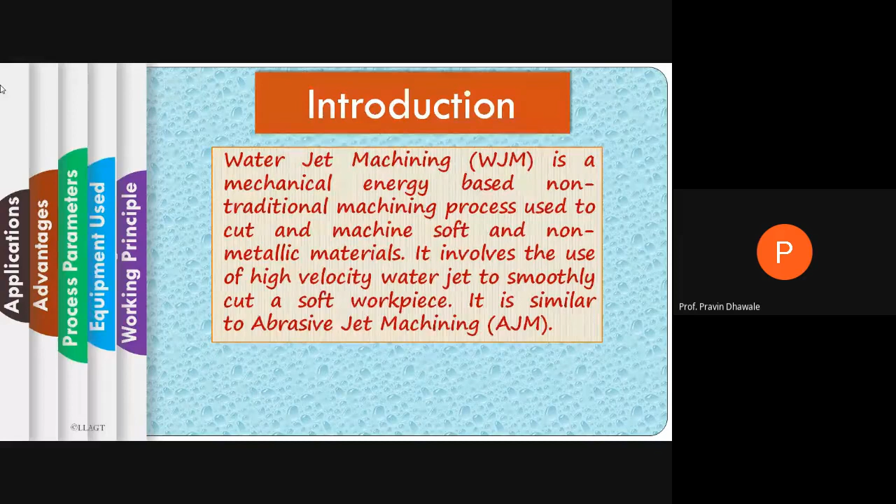Okay, so that's all about water jet machining. In short, the description about water jet machining: first point, it is a non-traditional mechanical energy-based process. Second point, it will be used to cut soft material as well as non-metallic material. And high-velocity water jet is able to cut this material very smoothly.

When it passes through this nozzle, its pressure energy is converted into kinetic energy. This happens because the nozzle has a convergent cross-sectional area where pressure energy is converted into kinetic energy. So at the outlet of the nozzle, you get a high velocity water jet. As the velocity of the water jet is very high...

Now, what are the different process controlling parameters in case of the water jet machining? What is the first parameter? That is the stand-off distance. What is the stand-off distance? It is the distance between the tip of the nozzle and upper surface of the workpiece.

Up to a certain limit, as we increase the distance of the tip of the nozzle from the surface of the workpiece, as that distance goes on increasing, there will be increase in the material removal rate of the workpiece. That is, as stand-off distance increases, the material removal rate also increases, but up to a certain level or certain point. Beyond that point, when you are increasing the stand-off distance, the water jet velocity gets reduced.

And if the velocity gets reduced, it will impact the removal of material from the workpiece. That is, with increase in stand-off distance, no doubt the material removal rate from the workpiece by water jet machining increases up to a certain point. Beyond that point, the material removal rate decreases because the velocity of the water jet keeps on reducing.

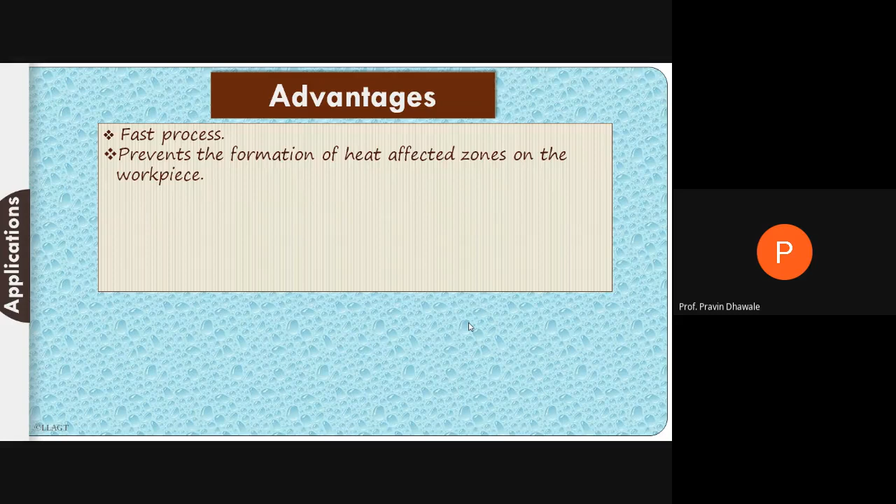It automatically cleans the surface of the workpiece. The same fluid acts as a carrier of the removed material from the workpiece. So there is no need for any other fluid or any other means to clean the workpiece in order to remove the material which is dug out by the process of water jet machining.

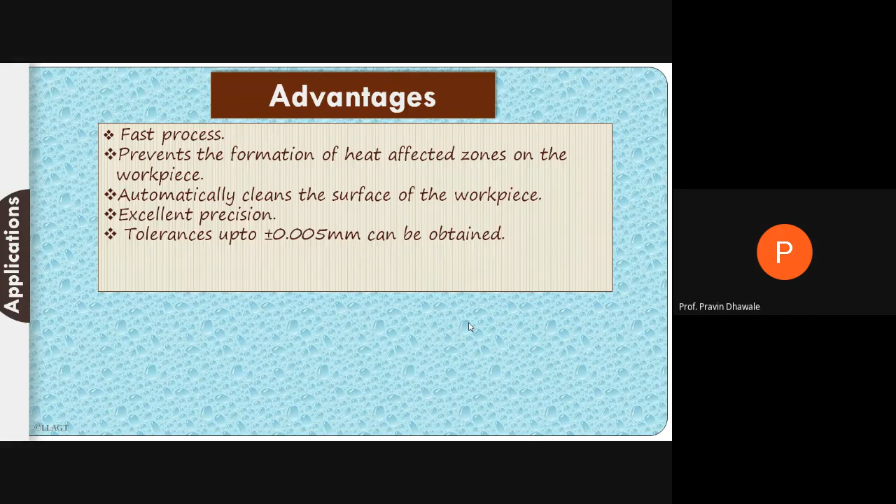Whatever accuracy or precision you get by using water jet machining, it will be more as compared to other non-conventional processes. The tolerance value, it will be obtained up to point not not 5 mm in case of water jet machining. That plus or minus point not not 5 mm tolerance is possible by using water jet machining.

Water jet machining cannot produce any kind of hazardous or harmful gases during the process of operation. So this process we may call an eco-friendly process. Water jet machining is an eco-friendly process.

These are some of the listed advantages in case of water jet machining. First, fast process. Second, prevents the formation of heat affected zone. It also helps to clean up the surface of the workpiece. It provides good tolerance up to a range of plus or minus point not not 5 mm with excellent precision. This process may be called eco-friendly because it does not produce any kind of hazardous gases. So these are the advantages of water jet machining. You have to write all these advantages neatly.

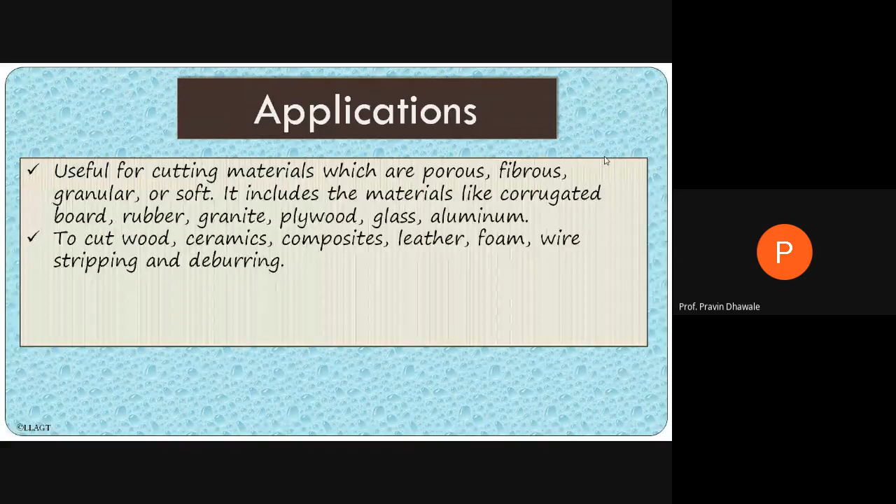The baseline is that the material must be softer, or non-metallic. It's used to cut wood, ceramics, composites, leather, foam, and for wire stripping and deburring. These are certain applications of water jet machining. Also, to machine or cut wood, ceramics, composite, and foam material, we may use water jet machining.

The next point is related to some specified applications, like in aerospace and similar industries. Cutting of asbestos is done using water jet machining in order to minimize airborne dust in the atmosphere. In certain aerospace industries, to reduce the production of airborne dust, cutting of asbestos is done using water jet machining.

It is used to cut fiberglass and polyethylene, which are used in certain automobile applications or in manufacturing automotive parts. Machining of such parts is carried out using water jet machining. So write down these applications of water jet machining in the field of engineering.

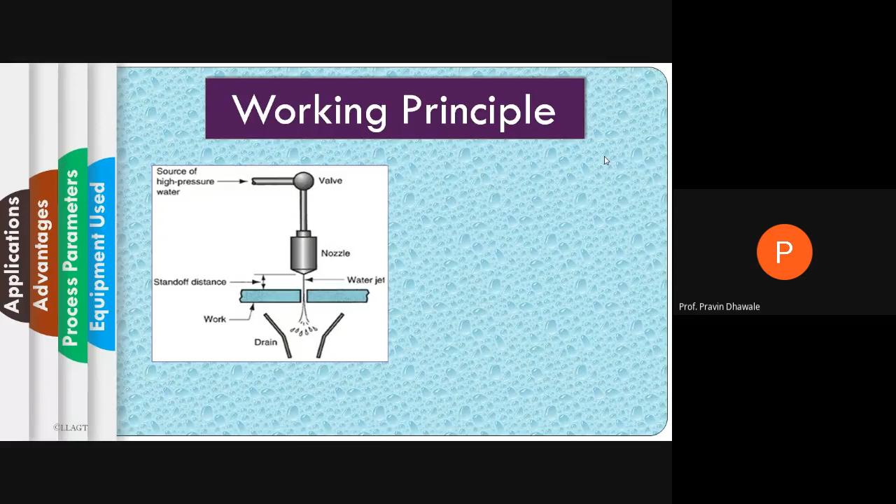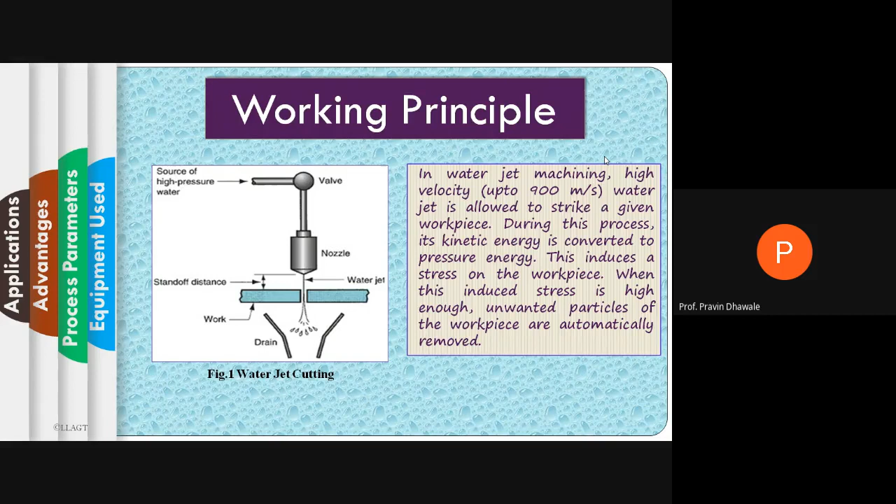Okay, I think it will be over. That covers the applications of water jet machining. So, to take a recap of this lecture: we started with the introduction of water jet machining, then discussed the working principle with the help of a figure, showing how the cutting process is carried out using a high pressurized water jet, which flows through the nozzle converting high pressurized water into a high velocity water jet. Using that high velocity water jet, we cut the workpiece.

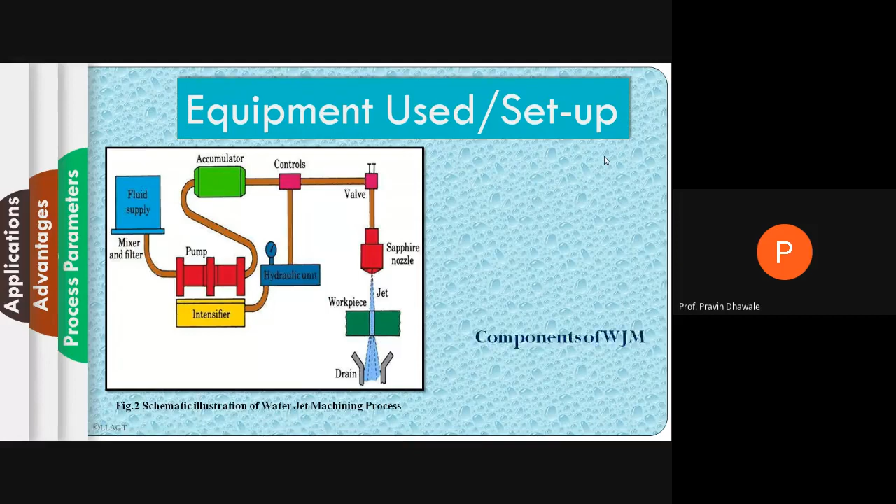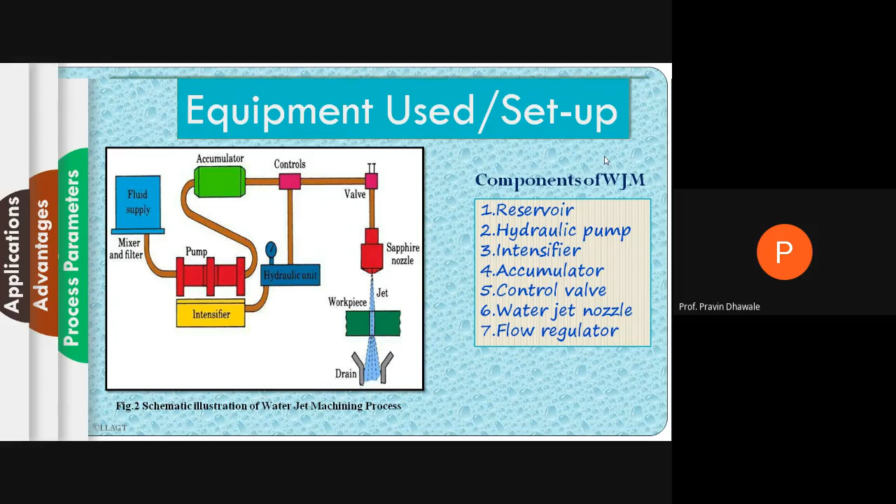We also discussed the experimental setup for water jet machining, which has different components like reservoir, intensifier, pump, accumulator, nozzle, direction control, and flow control. This is a very important parameter point. What are the different process parameters used in water jet machining, and what is the impact of each parameter on MRR, material removal rate? What is the effect of stand-off distance on material removal rate?

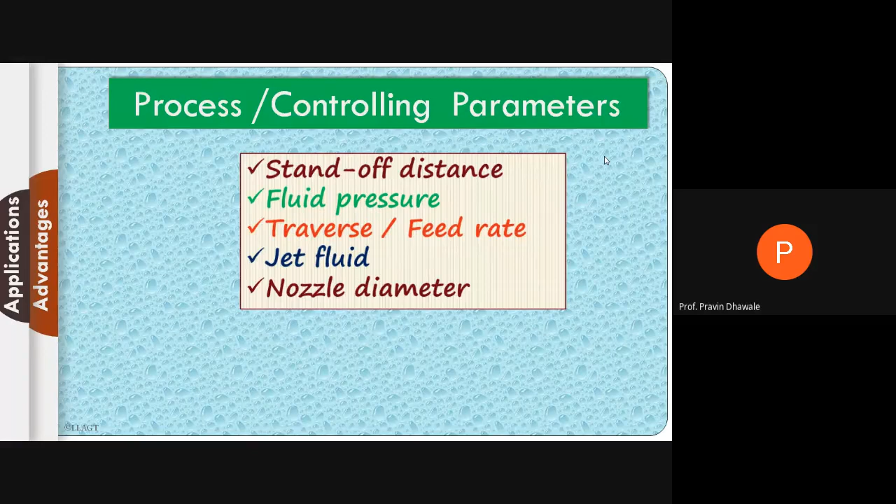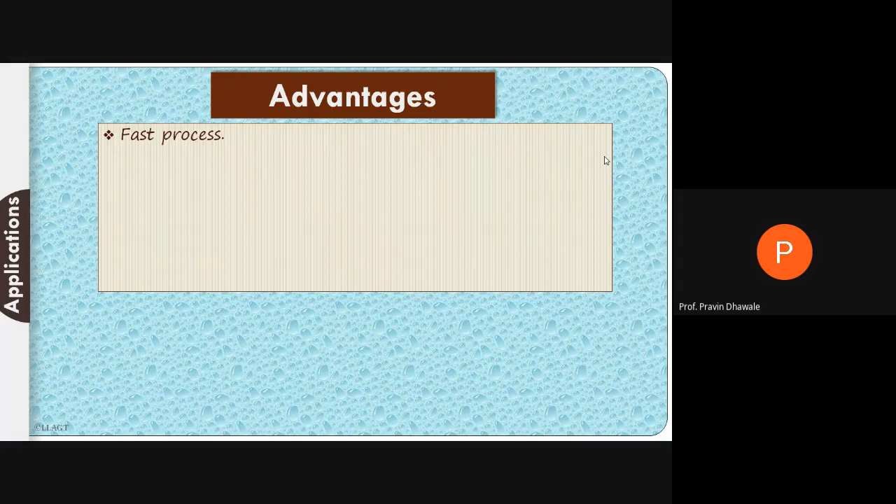What is the effect of fluid pressure on the performance of the water jet machining process? How do fluid velocity and nozzle diameter affect the material removal rate in water jet machining? And lastly, we discussed the different advantages of this water jet machining.

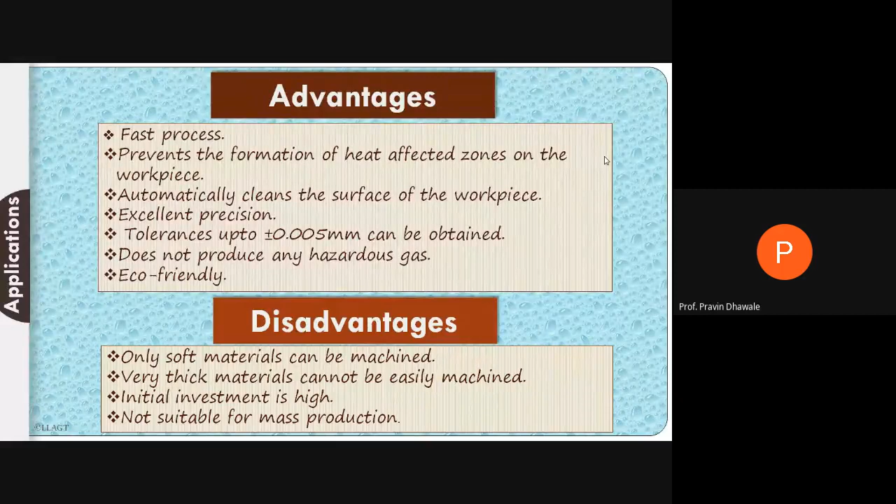Also, we discuss or focus on giving insight on limitations and disadvantages of water jet machining. At last, we cover the applications where we will use water jet machining, and why we study this non-conventional or advanced machining process.

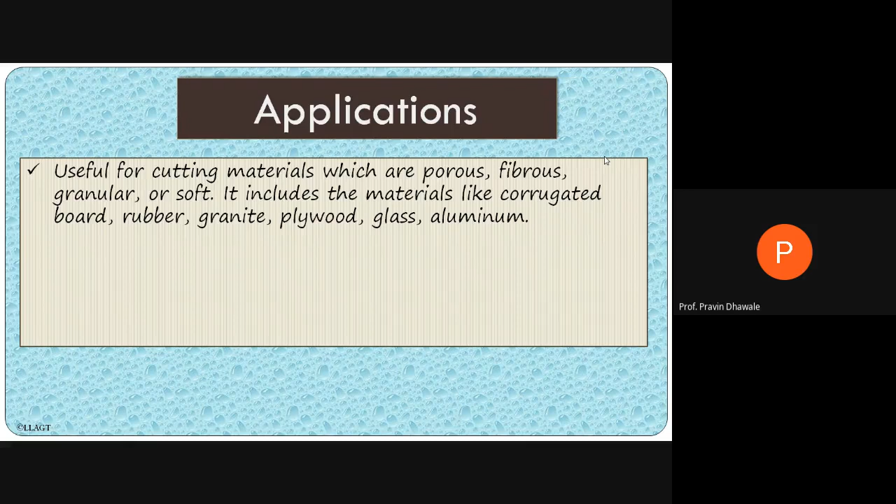We must require certain applications where conventional machining has certain limitations. That's why we study non-conventional machining processes, and among those, mechanical energy based processes. The ultimate answer to study water jet machining is when you have to machine certain soft materials and non-metallic parts—at that time you go for water jet machining.

These are certain applications of water jet machining. Does anybody have any query regarding this water jet machining process? Please feel free to ask. Otherwise, I will ask a question and you give the answer.

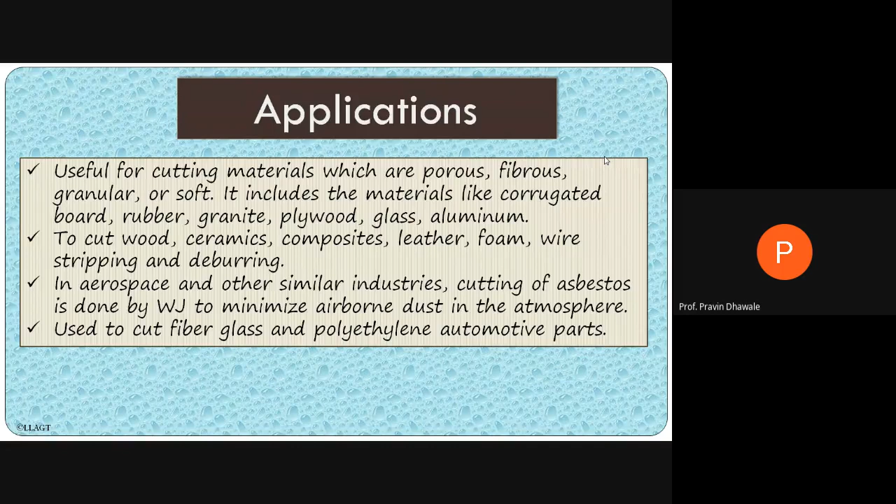I think the concept of water jet machining will be well understood by each one of you. Then we will discuss the differentiating points, or certain similarities and differences, between abrasive jet machining that we studied earlier and water jet machining that we studied right now. So what are the differences or similarities found in case of AJM, that is abrasive jet machining, and water jet machining?

Abrasive jet machining, water jet machining, abrasive water jet machining, and ultrasonic machining—right now we have studied these two processes, and two are remaining, right?

So whatever these four processes are concerned, all of them directly utilize mechanical energy to gradually remove material from the workpiece by the action of erosion. So we may say this is a similarity point for all kinds of mechanical energy processes—abrasive jet machining and water jet machining both utilize mechanical energy to remove material from the workpiece by the process of erosion. This will be the similarity point.

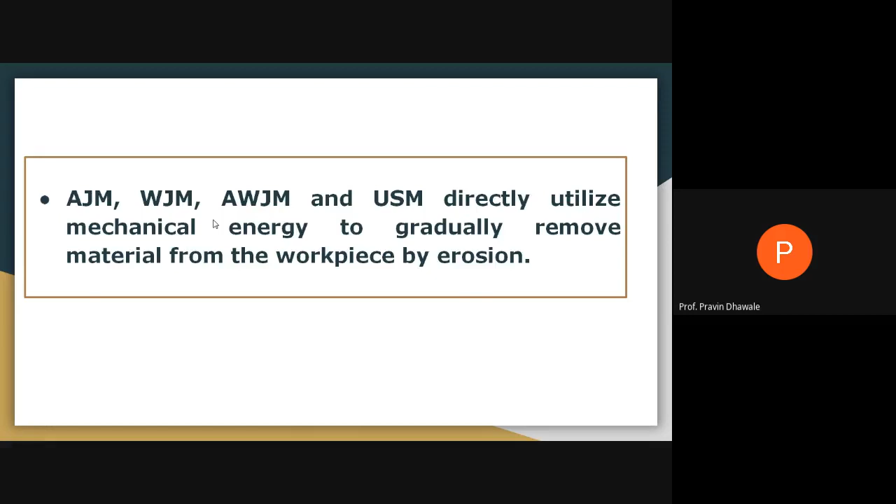Considering the abrasive jet machining setup, it requires a compressor, a filter and dryer, and also a mixing chamber in order to mix this pressurized air along with the abrasive feeder. So at the outlet of this mixing chamber, you are getting the mixture of compressed air plus abrasive particles.

That pressurized mixture of abrasive particles and air is allowed to pass through the nozzle. In the nozzle, pressure energy is converted into kinetic energy, so at the tip of the nozzle you get a high velocity abrasive jet. This high velocity abrasive jet, when it strikes the surface of the workpiece, removes material from the upper surface by the process of erosion.

Why does this happen? Because continuous bombarding of these abrasive particles at a particular location may cause digging or stress induction at that part, and because of that, erosion takes place and material is removed from that specific part of the workpiece.

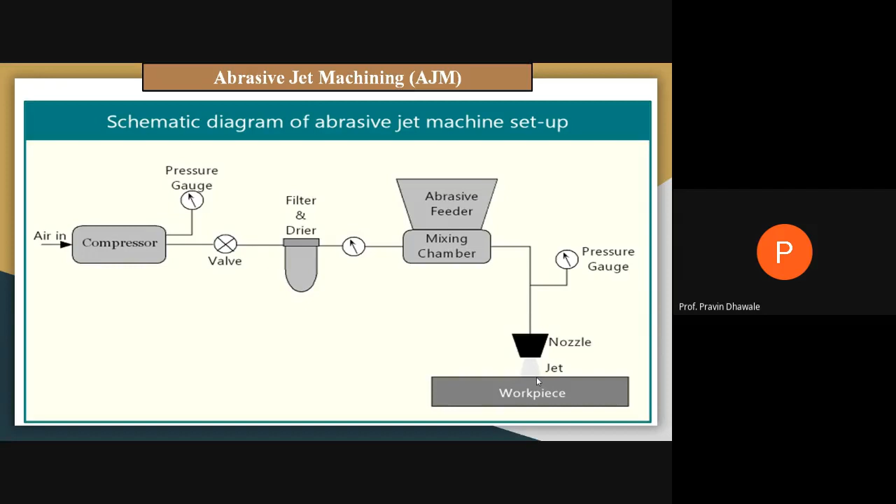This is the schematic diagram that we have already studied in case of abrasive jet machining. In abrasive jet machining, abrasive particles are allowed to impact or impinge on the work material with very high velocity, and this high velocity removes material by micro cutting action as well as brittle fracture of the work material. This will be the working principle.

See here, this is the workpiece, this will be the nozzle, and this will be the diameter of the nozzle. Through this nozzle, you allow high pressure abrasive particles to pass. When passing through this nozzle, you get a high velocity jet, with velocity up to a range of 300 meters per second, and the diameter of the nozzle may vary from 0.2 to 0.8 mm, or maximum 1 mm.

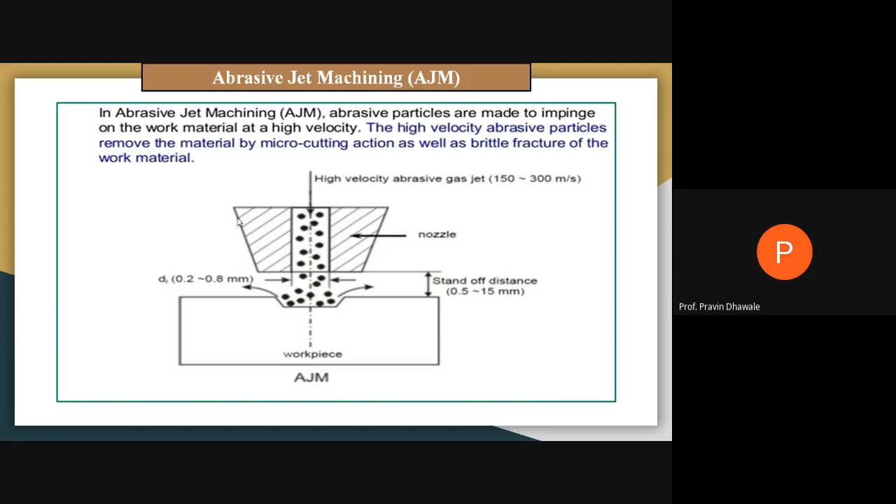The distance you have to maintain between the upper surface of the workpiece and the tip of the nozzle may vary between 0.5 to 15 mm, as we studied in an earlier lecture focused on abrasive jet machining. In abrasive jet machining, material is removed by the process of erosion, which is nothing but removing material by micro cutting action with a certain amount of brittle fracture of the work material.

Just now we have seen water jet machining—we studied the block diagram of water jet machining. In the previous slides, I already explained the working of water jet machining, the different components or equipment used in the setup, and the function of each component.

Sapphire is the material used for this nozzle. This will be the stand-off distance, that is, the distance between the tip of the nozzle or nozzle mouth and the upper surface of the workpiece.

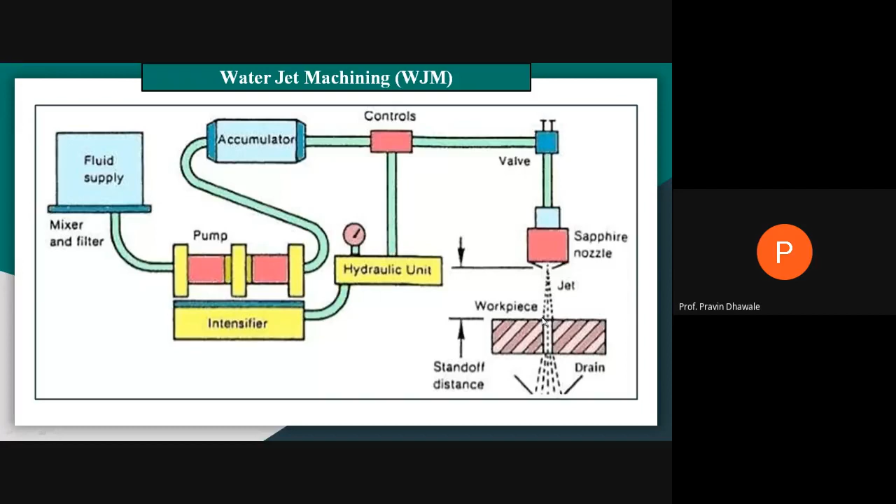So, in short, when discussing the similarities and differences between abrasive jet machining and water jet machining, the similarities will be shortlisted in this slide. First, both abrasive jet machining and water jet machining are non-traditional machining processes, also called non-conventional machining processes or advanced manufacturing processes. However, none of them is considered a hybrid process.

It will be purely a mechanical energy based process. No other form of energy is utilized to carry out the machining or material removal process. So it may be called a non-hybrid process.

The second point is related to the type of energy used to perform the material removal operation of this non-conventional machining process. Abrasive jet machining and water jet machining are both mechanical energy based non-traditional machining processes, and they directly utilize the kinetic energy of the jet - it may be an abrasive jet or a water jet respectively. That high velocity jet of energy is utilized to remove material from the workpiece.

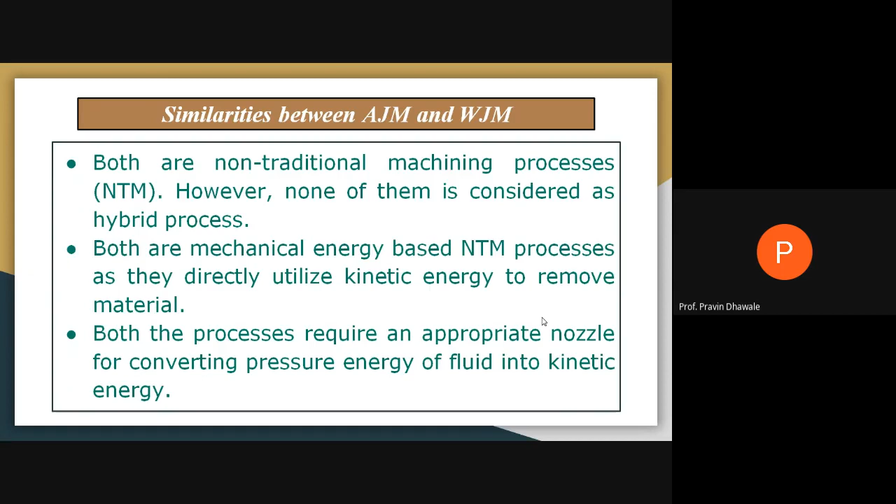The third point related to similarity: both processes require an appropriate nozzle. In both processes we require appropriately shaped, sized, and selected material of the nozzle for converting pressure energy of a fluid into kinetic energy. In abrasive jet machining, you supply high pressurized abrasive and air mixture at the inlet of the nozzle. In water jet machining, you supply high pressure water at the inlet of the nozzle. At the outlet of the nozzle, in both processes, you get a high velocity jet - abrasive jet in case of abrasive jet machining, and water jet in case of water jet machining. So in both cases, we must require the nozzle to convert fluid pressure energy into fluid kinetic energy.

The performance of abrasive jet machining or water jet machining does not depend on electrical and thermal conductivity and chemical inertness of the workpiece material. This point shows the similarity with respect to the properties of the workpiece - electrical conductivity, thermal conductivity, chemical inertness. So whatever material we are using in abrasive jet machining and water jet machining, there will be no change in the properties of the workpiece.

Next point: none of these processes is associated with burr formation and thermal damage. Burr formation means that while removing material from the workpiece, a certain amount of material remains along with the cut part, so it is called a burr. So formation of a burr and thermal damage due to a heat affected zone is not possible in abrasive jet machining.

Last point of similarity: both processes can be integrated with a CNC machine in order to have sufficient control and precise delivery of the jet - abrasive jet or water jet. That is, both processes can be computer interconnected. Computer numerically controlled systems can be used for abrasive jet machining as well as water jet machining.

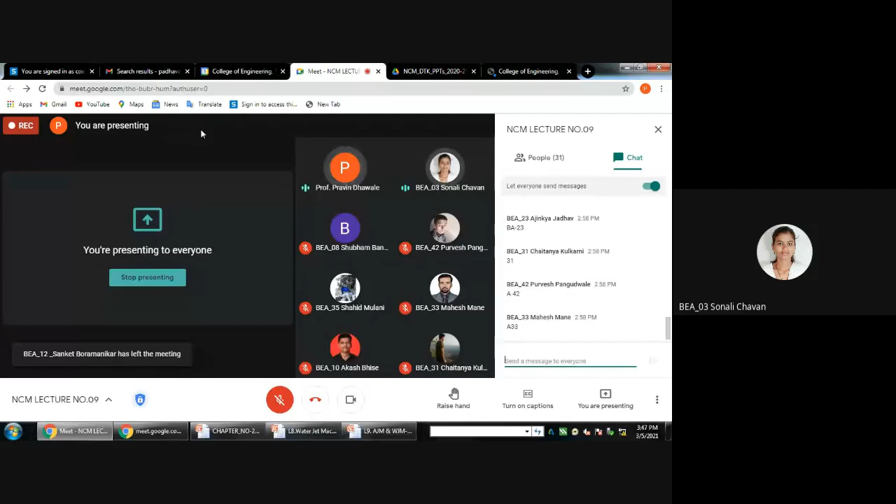Yes, Sonali, do you have any query? Sonali: No, sir. Hello. No, sir. Yes, please. No, sir, no inquiry. Okay, okay, okay. Thank you.